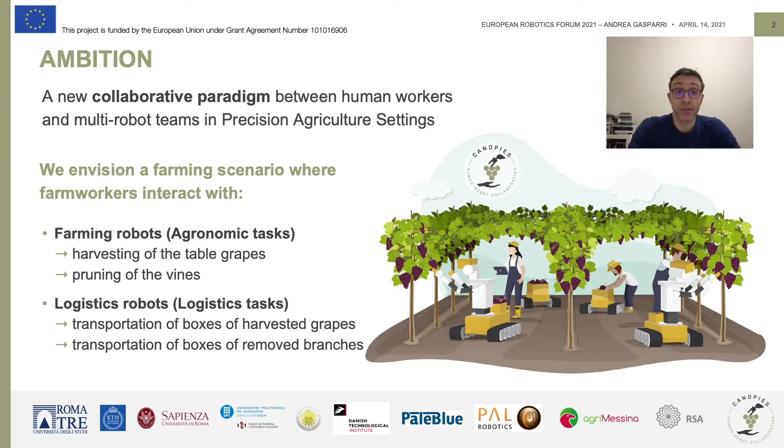As you can see on the right, we envision a farming scenario where farm workers will be interacting with 2 different kinds of robots. We will have farming robots, which will take care of the agronomic tasks, and logistics robots, which will take care of the logistical tasks.

Our approach is to design an efficient data-driven technological solution based on robotics and artificial intelligence for the sustainable agriculture of tomorrow. In this regard, we will propose novel human-robot interaction techniques which will ensure enhanced safety and coexistence in the shared workspace.

We will also develop novel human-robot collaboration techniques in order to achieve effective cooperation through explicit interaction. Finally, we will also develop novel multi-robot coordination techniques to ensure scalability over large areas.

Overall, we truly believe that Canopies may have a significant impact in the agri-food sector. On the one hand, we will provide a means to handle the increased complexity of outdoor, unstructured, and dynamical environments, such as for permanent crops.

In the meanwhile, we will also mitigate the shortage of agricultural labor, which is one of the major challenges that the agri-food sector is facing right now.

In addition, we will promote a better educational model, which is required to interact with the cutting-edge technological solutions that will be developed. Furthermore, we will also promote gender equality by reducing the drudgery typical of agricultural field operation. In this way, we will also render the agri-food sector appealing again for young generations.

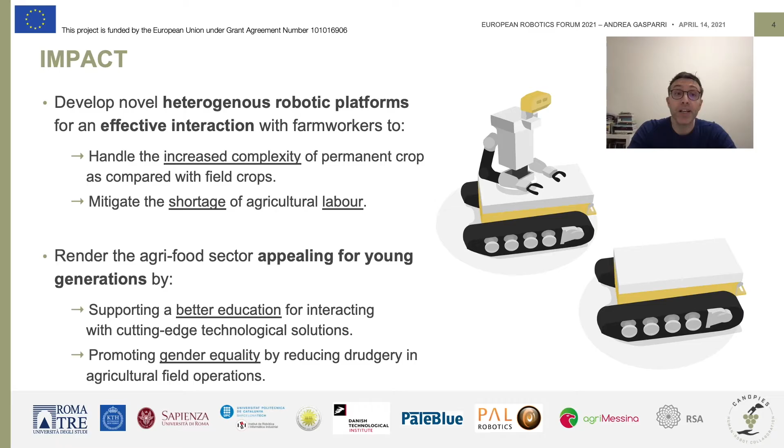Hello, let me pitch the Horizon 2020 Research and Innovation Project Darko to you. My name is Achim Lilienthal and I have the honor and pleasure to coordinate this project. The consortium includes 2 enterprises and 5 academic partners.

Darko targets the priority area agile production, so from a business perspective, we are talking about quick adaptation of production processes in response to customers' needs. The interest is in tools that enhance flexibility in production while maintaining cost and energy efficiency as well as quality.

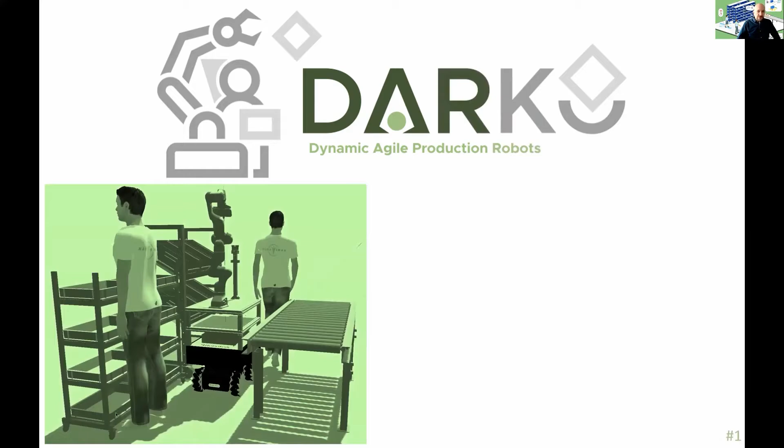The tools are production robots, which operate in environments shared with humans. For being capable, safe, and efficient, they learn and optimize knowledge and operations, for example, by learning motion patterns in changing environments to choose paths that avoid traffic jams.

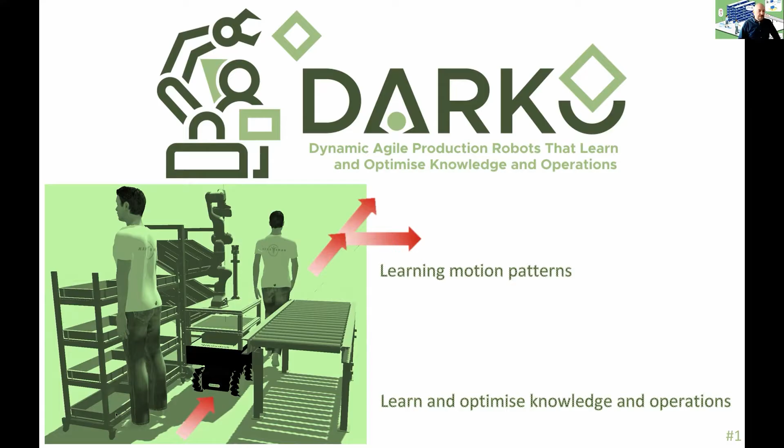So what are our objectives and what is the Darko approach? Darko sets out to realize robots with time and energy efficient manipulation capabilities demonstrated through pick and place in motion and throwing of objects, with energy efficient, inherently elastic manipulators and flexible end effectors.

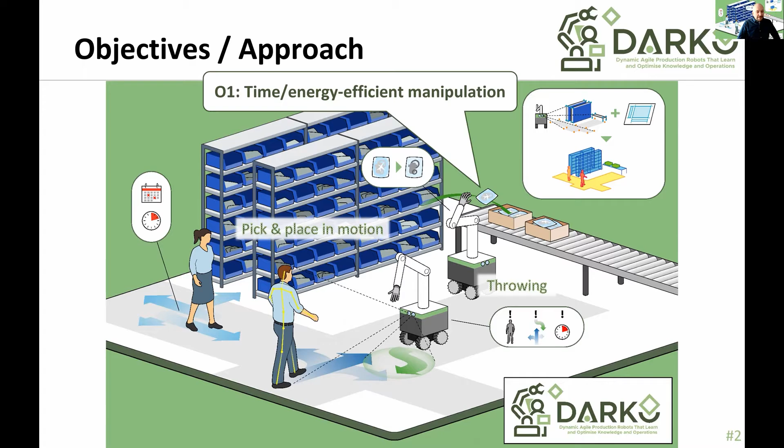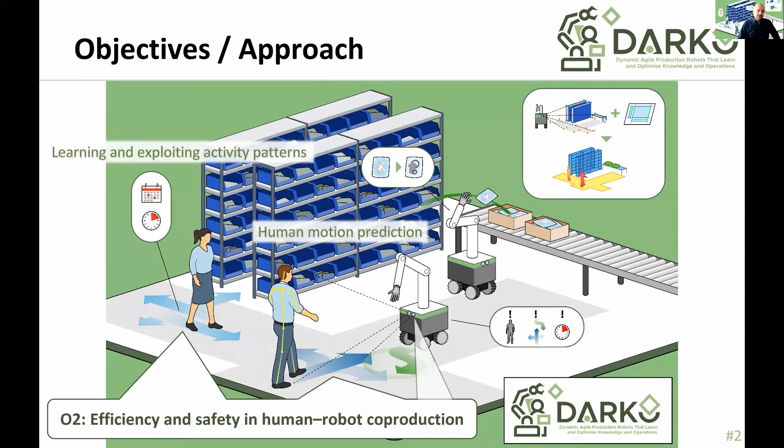Second, for safety, efficiency, and legibility, the robots need predictive planning capabilities through human motion prediction, learning and exploiting activity patterns, mutual communication of intent, and risk-aware planning.

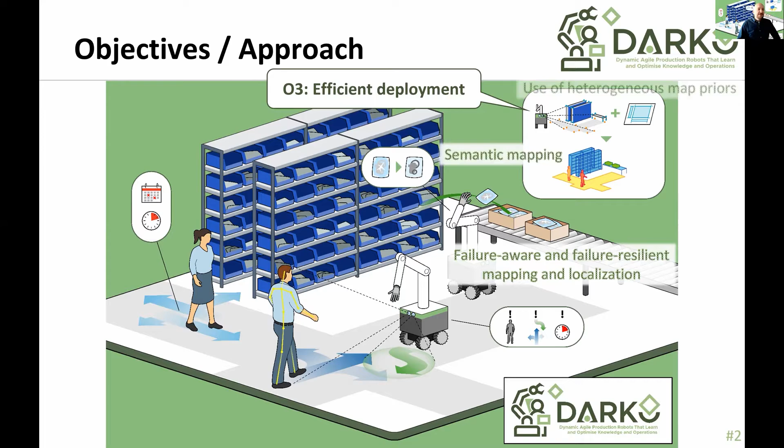The third key objective is easy and cost-efficient deployment, which Darko supports through the development of failure-aware and failure-resilient mapping and localization, semantic mapping, and information transfer from heterogeneous map priors.

To maximize its impact, Darko is aligned with use cases at the largest manufacturer of home appliances in Europe, and it will be demonstrated at the warehouse and at the Arena 2036 in Stuttgart, permanently showing our effort to lower technical barriers within logistics and agile production.

Darko will demonstrate improved autonomous capabilities in AI-enabled 3D perception and scene understanding, and it will go significantly beyond the current state of art in dynamic manipulation, not only for the benefit of agile production, but also for healthcare, agri-food, and so on. This is the project Darko.

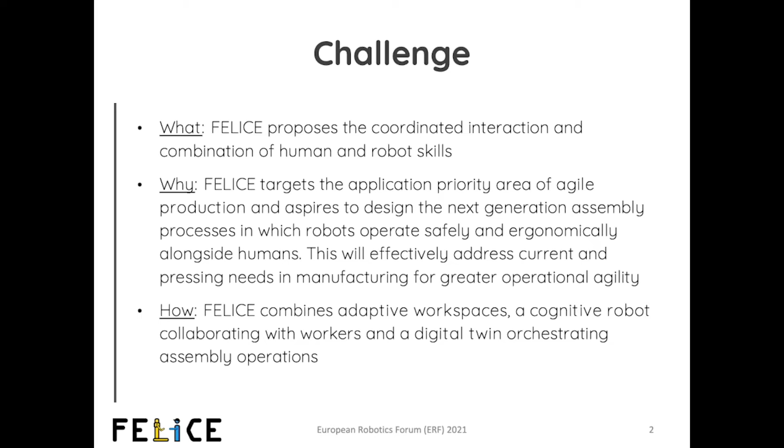The main project objectives are to develop context awareness via ubiquitous sensing, ensure safety in human-robot collaboration, amplify fluency and ergonomics in collaborative assembly tasks, and orchestrate the assembly process in real time. These contribute to the ultimate goal of realizing collaborative assembly lines for agile production in real environments.

Networking with relevant digital innovation hubs aims to support the exploitation of freemium assets and speed up prototyping.

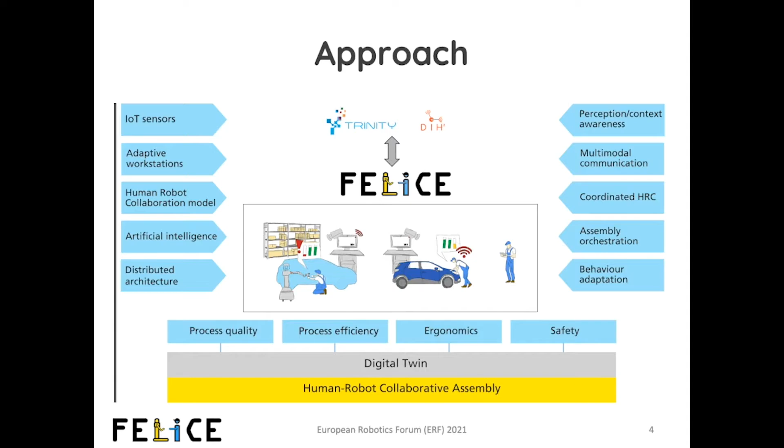FELICE's framework stands on five major pillars. The first concerns smart process monitoring via the integration of heterogeneous sensors and devices in industrial environments. The second relates to collaborative robots with advanced cognitive capabilities, mobility, and adaptability for joint task execution, addressing safety and fluency. The third deals with an AI system for real-time orchestration and control of adaptive assembly lines. The fourth supports a distributed architecture computing paradigm and reusable toolkits, while the fifth is about technology validation in real industrial environments.

FELICE impacts innovation, competitiveness, and market growth through increasing the adoption of collaborative industrial robots by lowering costs with a single mobile platform that can support different workstations and assembly tasks on demand, with improved flexibility and agility. It also improves data privacy and security through a privacy-by-design approach for handling personal data and security mechanisms for the distributed processing of data, along with AI-augmented automation with the human worker at the center point.

This leads to the realization of future smart factories, interoperability between sensors and modules, and expandability and modularity of the developed technologies. Additional societal impacts concern individualism, improved life quality and workability, healthy and safe workplaces, as well as decreased automation bias.

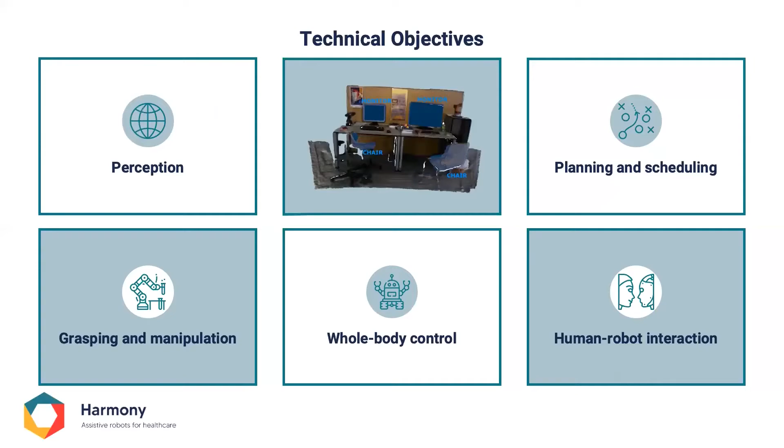We will formalize object-based perception to capture multimodal scene information needed for robot navigation and object manipulation. We will develop robotic localization and mapping for dynamic object-based environments, and we will provide adaptive, collision-free motion plans as well as joint action planning and execution with human collaborators.

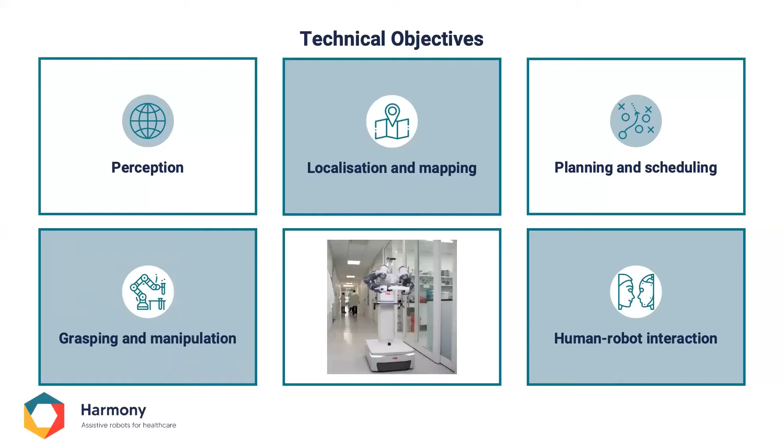Our robots will learn clinically verified grasping and manipulation procedures from expert demonstrations via an immersive control interface. We will develop robust and compliant whole-body motion planning and control for interacting with unknown objects, and we will deliver safety and acceptability recommendations for the use of mobile manipulators in human-centered environments.

The success of our project also relies on integrating these technologies into a user-intuitive framework. Harmony targets two exemplar use cases to validate and verify our technologies.

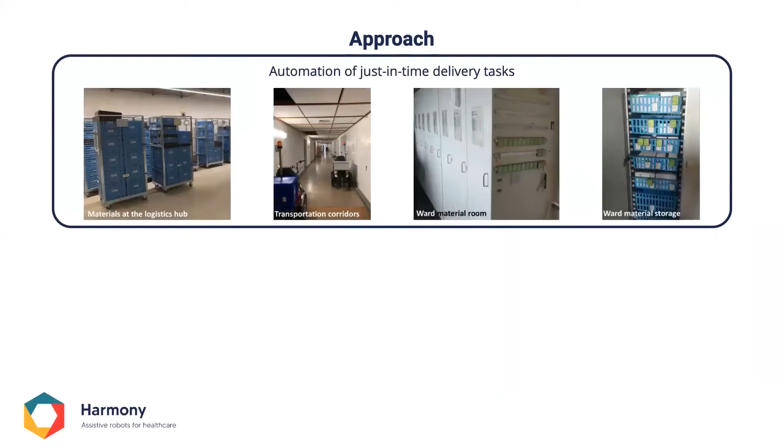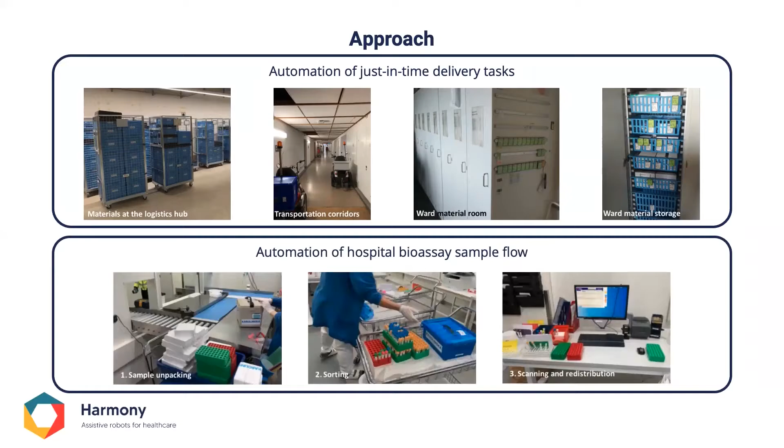The automation of just-in-time delivery tasks requires robots to fetch and deliver materials on demand from across the vast logistics network of a hospital. The automation of hospital bioassay sample flow requires robots to unpack, sort, and process incoming patient samples for on-site testing or for redistribution to off-site testing.

The fundamental capabilities we're targeting in Harmony directly meet growing needs in all sectors: healthcare, agile manufacturing, agri-foods, as well as industrial inspection and maintenance, and more.

Beyond providing flexible and user-friendly automation, Harmony will bridge the gap in existing industry standards to cover mobile manipulators. This will clarify technology certification requirements and remove existing barriers to expand the use of assistive robots, increase industry uptake, and ultimately strengthen Europe's competitiveness in the cobot market.

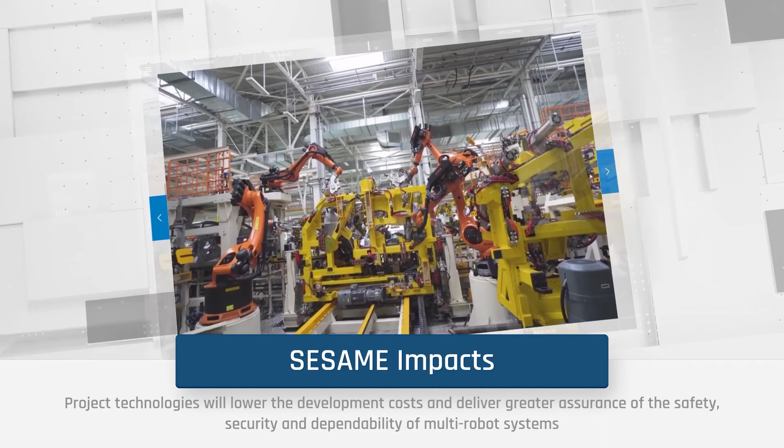Tracebot: traceable robotic handling of sterile medical products. The objectives and ambitions regarding Tracebot.

Today, manual procedures still dominate when it comes to creating and testing new healthcare products, since regulations require understanding of the execution of each process step and systematic checking to verify task completion.

Current robotic solutions lack systematic action traceability and failure resistance. The objectives of the Tracebot project are to bring verifiable actions to robot manipulation by reasoning over sensor-actor trails.

This is done in a traceability framework based on digital twin technology, to extend current robot motion planners with the execution of self-checking procedures and create a semantic trace of the actions performed, and to extend current robotic system technologies to perceive and manipulate the challenging but regular objects in pharmaceutical settings.

The goal is to create flexible robotic systems able to perceive, act, and reason in the pharmaceutical domain, to ensure that any manipulation action is verified, thus leading to the audit trail required in the regulated environment.

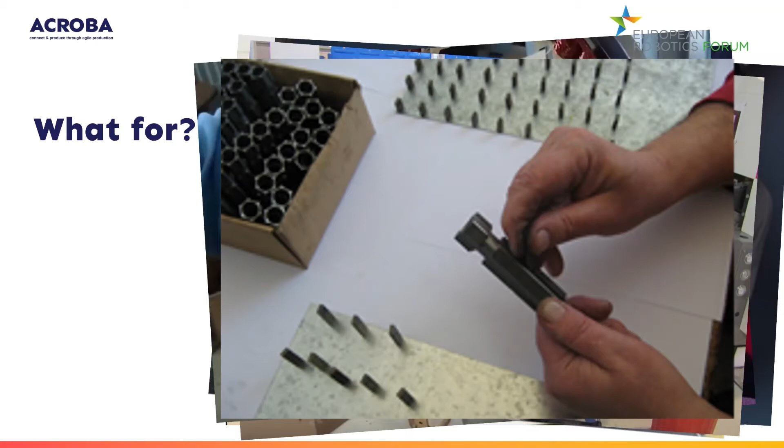At the beginning of our project stands the observation that in a lot of manufacturing enterprises, work is done by manual labor, despite the fact that it's difficult to find labor because the operations are tiresome, bear potential for injuries, need to be done in sterile environments, involve harmful chemicals, can be error-prone, or sometimes simply a third or fourth hand would come in handy. It is our ambition in this project to give those enterprises relief by proposing them a platform which finally makes the use of robots a pleasant and, more importantly, a profitable undertaking.

What we want to do from a technical point of view is to build a platform. It will offer a series of cognitive capabilities. During operation, these will be fed by process feedback. Among the capabilities will be a task planner fitting into the existing workflows of the manufacturing and being able to read CAD files and coordinate the robot's actions.

Additionally to the task planning, the CAD data will also be used to populate a virtual gym, which in turn is necessary to perform deep reinforcement learning without causing damage. Acroba will also be able to learn from demonstration, which hence is another cognitive capability included. It will be implemented alongside corresponding tools for user interaction.

Finally, to make the actions of the controlled robots precise and safe, the execution of them will not only depend on single sensory readings, but the platform will combine the information from all available sensors to provide multimodal perception.

With these capabilities in place, our pilot lines will be able to detach 3D printed parts for sterile medical use from their supports, wash and cure them. They will be able to deburr large injection molded plastic parts, both with little to no interaction in so-called lights-out manufacturing scenarios. They will also be able to wind coils for motors and place magnets on rotors.

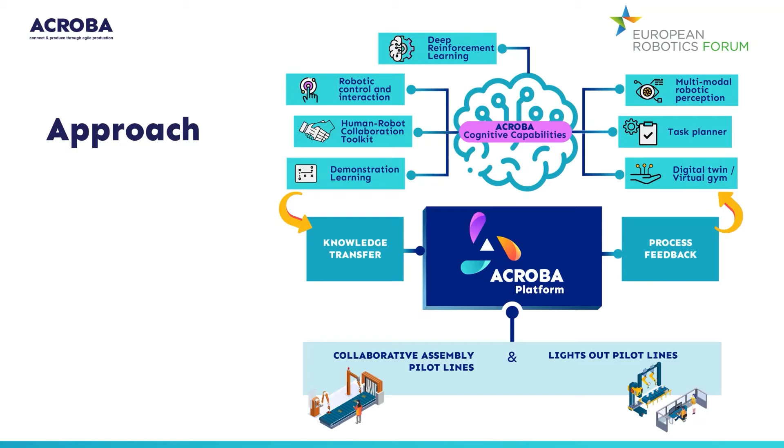They will place pin through hole components in PCBs, both together with humans supporting them in collaborative scenarios. And of course, the Acroba platform will easily be portable to other manufacturing cases.

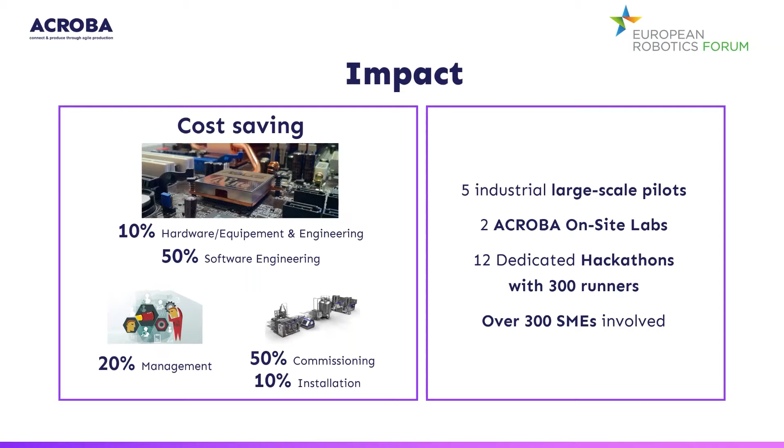Due to the continuous increase of the world's population, the production of environmentally friendly, sustainable food presents the big challenge of the 21st century. Insect farming might represent a sustainable solution to the challenge of securing food, with proteins from insects being the basis of novel food, and insects also being a valuable food source for farming animals. However, to make insect farming a viable solution, research innovation, the development of farming protocols, and public awareness campaigns on insects as food and feed are dramatically needed.

The H2020 project CoRoSect, on cognitive robotic systems for digitalized and networked automated insect farms, targets these challenges. The ambition of the CoRoSect partners is to make a viable contribution to securing sustainable environmentally friendly food for humans and animals. Together we bring new insights to automated insect farming and develop novel digitalized integrated robotic solutions. We will create an advanced, safe collaboration environment where humans and robots harmoniously share and undertake processing and manipulation tasks.

We will also advance AI-based cognitive perception at different phases of the life cycle of the insect farm process and develop cognitive robots with sophisticated capabilities for robotic action planning, manipulation, and control. CoRoSect's approach focuses on providing a novel robotization and digitalization concept, enabling upscaling and optimizing insect production capabilities, utilizing state-of-the-art robotization and artificial intelligence. To achieve this goal, CoRoSect develops cognitive robots, smart mechatronics, as well as artificial intelligence for machine perception and human-robot collaboration, and combines these with new concepts for farm modeling and orchestration, following the RAMI 4.0 framework.

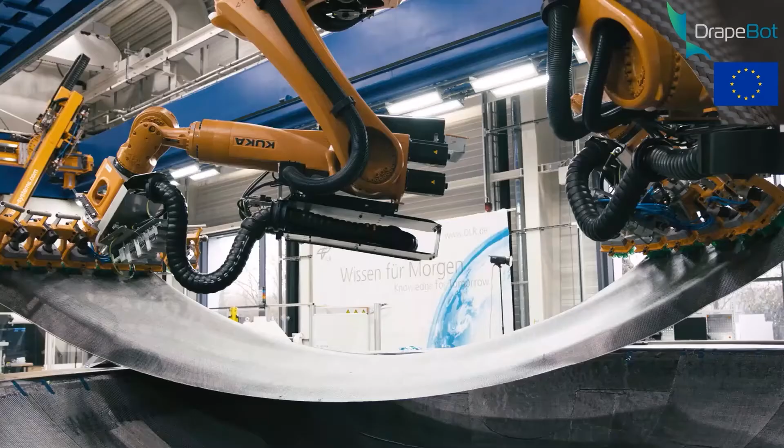We also need to make sure that there are no wrinkles and that the fiber is going in the right direction. Draping may include large patches of material, which can be up to several meters long, and also very small patches, which are just a few centimeters wide.

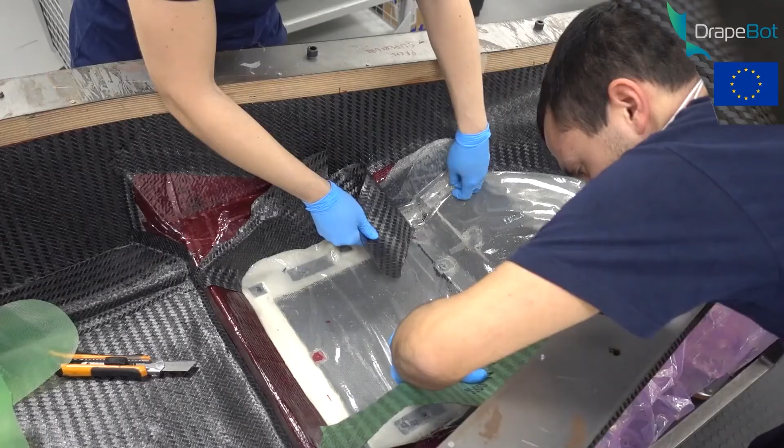Collaborative draping tries to combine human and robot activities during the draping, especially during the transport of the large patches. But also during the draping itself, the robot will be able to drape the areas of low curvature, which are usually larger, while the human will do the higher curvature areas that are difficult to handle. Overall, we are trying to increase the efficiency of the draping process.

The main approach that we are looking at is to perform task and motion planning in order to split the tasks between the human and the robot, for example, during the transport and during the draping of areas of low and high curvature. In order to achieve this, we equip the gripper with additional sensors to allow accurate placement and to have some kind of feeling during the transport of the material.

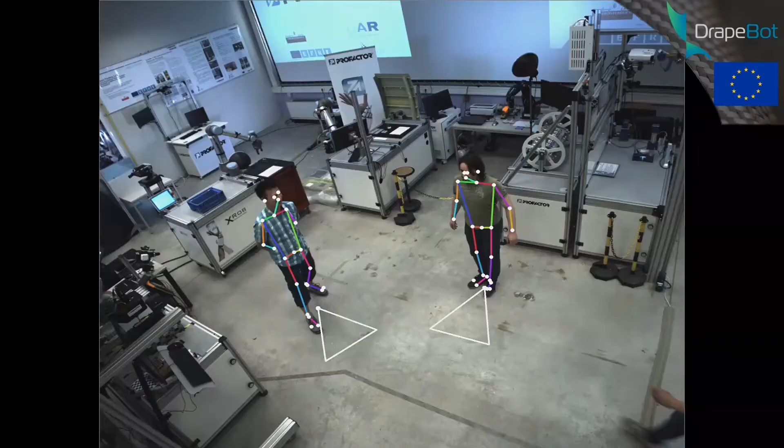The work cell itself will be equipped with visual sensors to estimate human position and localization and to make a prediction about the intentions of the human. Finally, there will be a low-level control loop that is used to maintain the correct tension on the material and to ensure an accurate draping process.

The Drapebot project will have impact on reducing the costs of the draping process. We estimate that 30 to 50% are feasible, and the technologies that are developed will be usable for about 2,000 companies in Europe. At a larger scale, we try to provide methods that allow efficient human-robot collaboration, and we will have 2 robotic work cells available in the end that are also used for disseminating best practice.

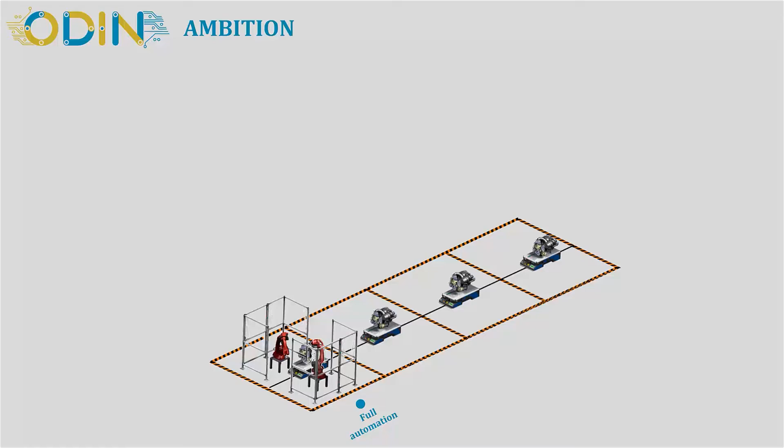Odin is a European-funded program aiming to deploy open, digital, industrial and networking pilot lines using modular components for scalable production. In fixed automated systems, although robots are fast and dexterous, their actions are pre-programmed, and it takes a lot of time and effort to add new processes in the same factory.

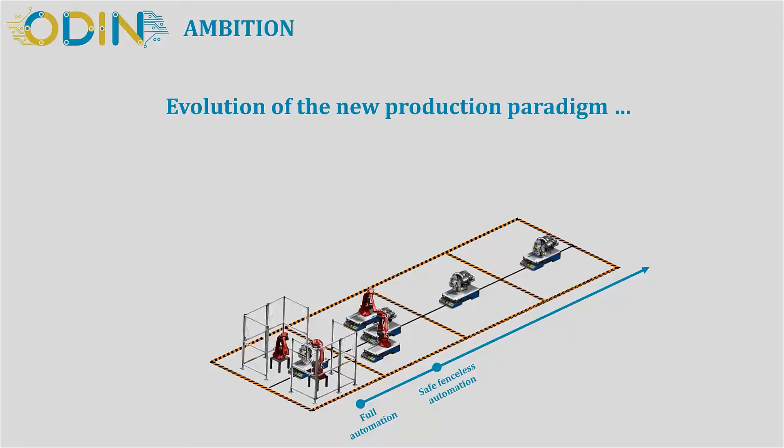To address this flexibility limitation, new production paradigms have been emerging, empowered by the development of advanced robotics capabilities. Novel perception abilities have been deployed to enable the autonomous operation of robots under fenceless workplaces. Resource mobility has been introduced as a key enabler to assist human operators during production. Advanced safety systems, integrated with powerful artificial intelligence tools, can boost the ultimate goal of seamless collaboration between robots and human operators.

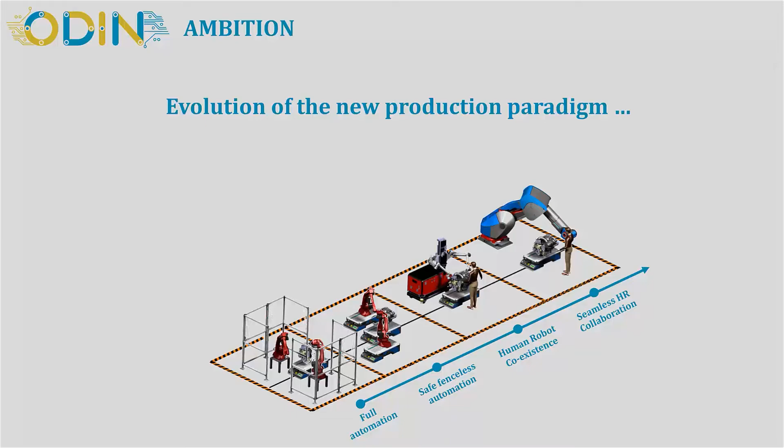The vision of ODIN is to demonstrate that these modern robot capabilities are not only technically feasible, but also efficient and sustainable for immediate introduction at the shop floor.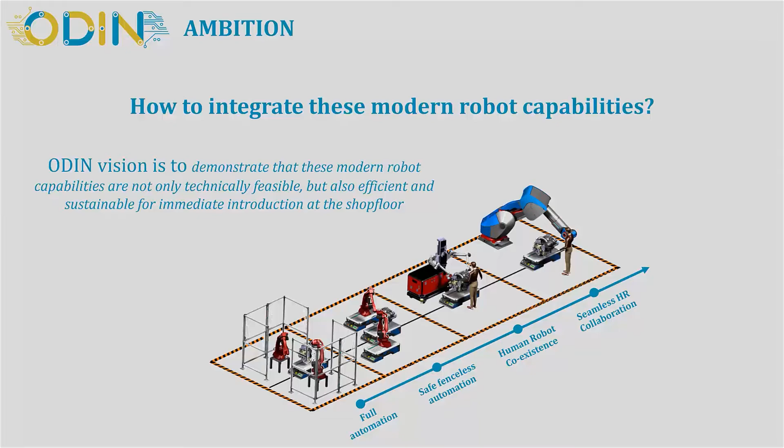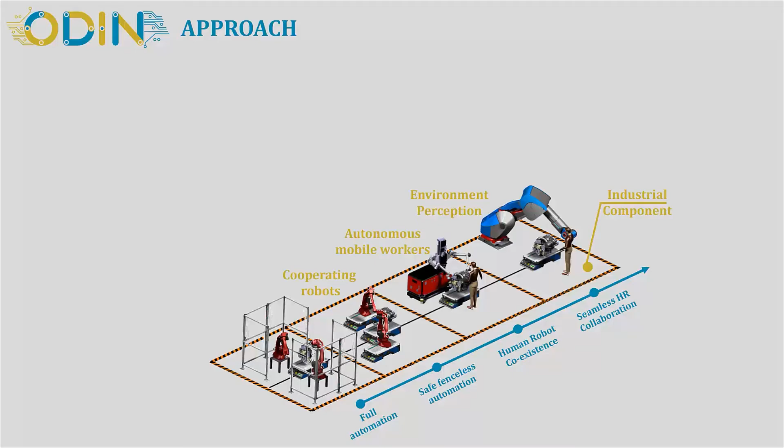To accomplish this, Odin aspires to enable the introduction of mobile, autonomous, environmentally aware and collaborative robotics in industrial settings, and create digital validation tools for these robotic systems to allow scalability with minimum complexity and integration risks.

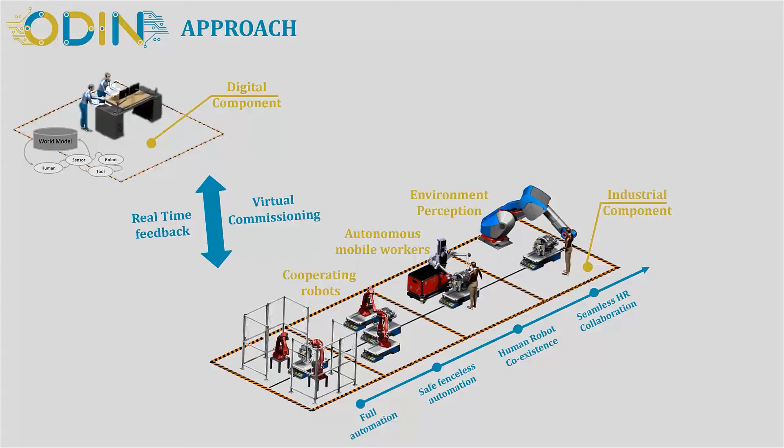Create an innovation ecosystem to enable the sustainability of open pilot lines, involving robotic application stakeholders and inspiring further deployment. Deploy an integration architecture with open interfaces, allowing the communication of all robotics hardware and control systems through safe and secure means.

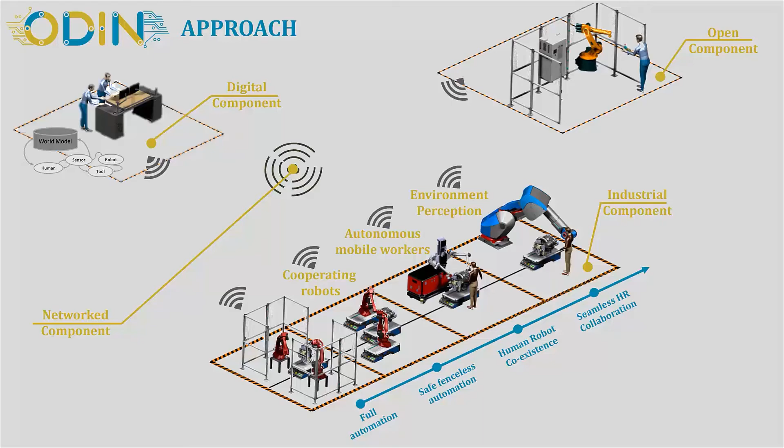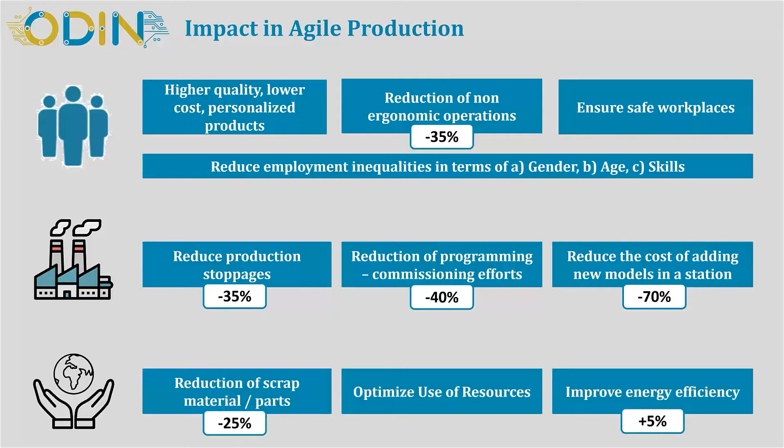Odin aims to make a change in agile production towards 3 directions. In society level, by facilitating the production of personalized products while supporting human operators in production. In the European manufacturing domain, by enabling sustainable and cost-effective processes. And in environmental level, by optimizing the use of material and resources.

The consortium consists of 15 partners from 8 European countries, carefully picked to implement the vision of Odin. To learn more about our activities, we invite you to visit our project site and connect with us in our social networks.

Robotics and farm automation technologies have seen a significant spike in interest and investment, marking the start of a structural change in food and farming. But for the most part, commercial robotics is still mainly unexploited.

Robs4Crops promises to bring a high-tech revolution to farms and offer a tremendous potential impact on productivity, efficiency, and environmental sustainability. We are a multidisciplinary network building a family of fully autonomous robotic systems ready for large-scale commercial trials.

In a bold commitment to mainstreaming robotic farming, Robs4Crops will develop a safe testing ground for iterative development and innovation through a network of collaborating partners.

The existing agricultural implements and tractors will be upgraded so that they can function together with existing agricultural robots as part of a fully autonomous robotic system. Our flexible and modular new generation system will consist of 3 elements: smart implements, autonomous vehicles, and the farming controller.

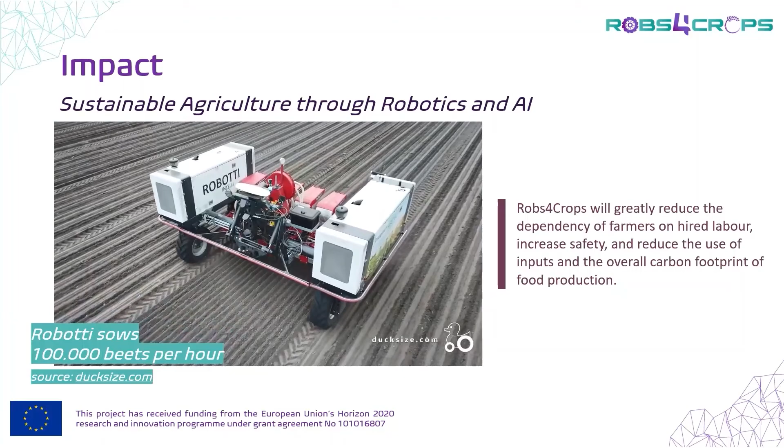Agriculture accounts for around 10% of greenhouse gas emissions in Europe, with little improvement over recent years. From more efficient crop management to chemical-free weeding, the fields are ripe for robotics and artificial intelligence. Besides, agriculture is very sensitive to the cost and scarcity of labor. Making cultivation practices more efficient and sustainable is critical.

While the cost of labor affects the profitability of farming, the COVID-19 pandemic demonstrates that the scarcity of labor threatens the very existence of our food supply chains from farm to fork. Robs4Crops will greatly reduce the dependency of farmers on hired labor, increase safety, and reduce the use of inputs and the overall carbon footprint of food production.

Hello. As a former robotics teacher and organizer of international robotics competitions, I have over the years seen thousands of people who are really fond of robotics, and they believe that robotics is definitely a source of innovation as well as economic growth. As a citizen, I fully acknowledge the benefits that robotics brings.

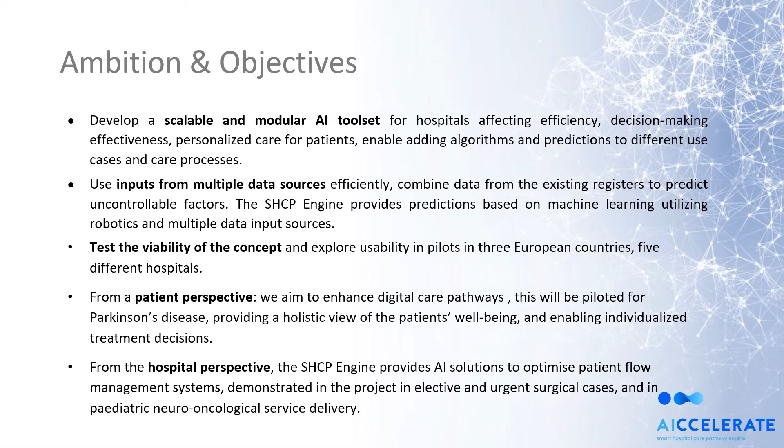Our objective is to use efficiently the different data inputs that are generated in hospital operations, including IoT and robotics devices. This concept will be tested and piloted within the project in 3 different European countries, and 5 hospitals.

The Smart Hospital Care Pathway Engine includes a standardized data input interface, a toolset that can be used in different areas of hospital operations, as well as data outputs and a UI layer. This solution can be integrated to different data infrastructures depending on the hospital's current state.

We will be having 3 different pilots, one for patient flow management in the surgical units, one for chronic adult care, and one for chronic pediatric care. These different pilot applications will be testing the viability and scalability of this concept.

Our expected impacts include using and allocating healthcare resources more efficiently, providing personalized care and digital care pathways for patients, and optimizing patient flow. We also hope to contribute to efficient algorithm development, as well as evidence-based and trustworthy AI in the healthcare arena.

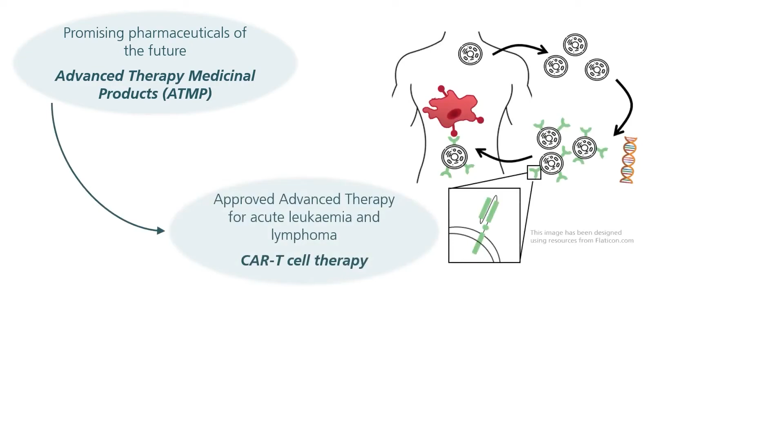One therapy that is already being applied for the treatment of acute leukemia and lymphoma is the so-called CAR-T cell therapy. The manual processes currently used in laboratories cause high costs, require long production times, and have only a moderate chance of success.

The Aidpath Consortium has set out to automate AI-powered CAR-T cell manufacturing in the hospital, making this therapy accessible to a wide range of patients.

The CAR-T cell manufacturing will take place in the hospital in an automated platform, in compliance with all regulatory requirements. The entire process chain is supported by artificial intelligence, which not only suggests patient-specific process sequences, but also optimizes the whole manufacturing process on the basis of the cell behavior.

A secure data infrastructure enables continuous learning of the artificial intelligence and straightforward connection to existing IT systems in the hospital.

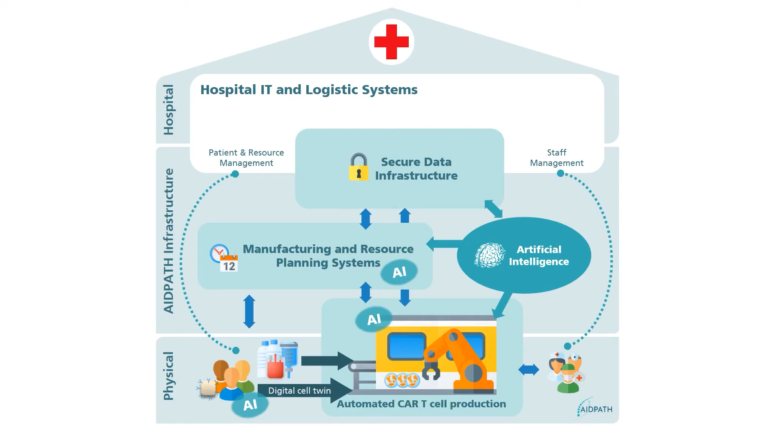Over the next 4 years, Aidpath will demonstrate that AI-based technologies are effective for automating the process of advanced therapies. Aidpath will build the basis for a deployable platform so that pilots can be initiated in multiple hospitals.

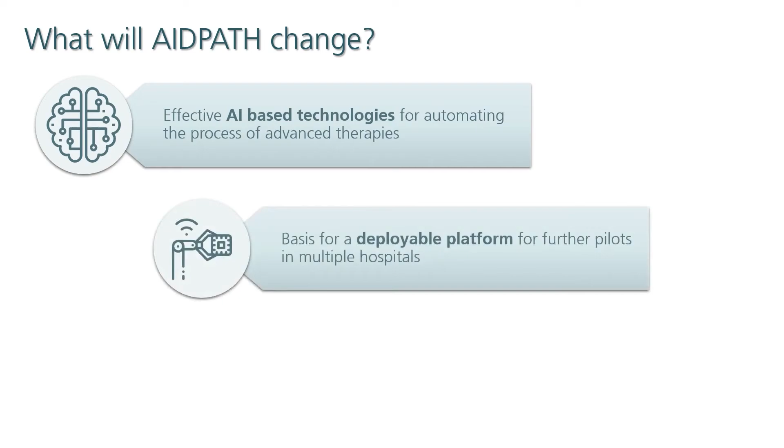Also, Aidpath will create an innovation ecosystem for a lively exchange of the stakeholder community, driving the concept of the smart manufacturing hospital forward.

Hello, I'm Thanasis Poulakitas, the coordinator of HosmartAI, and I will now give you a very brief introduction to this project. Our vision is to support an effective and efficient healthcare system transformation, which will utilize AI and robotics.

Our mission, that is our main objective, is to provide an AI-supported platform that will allow the composition of smart services for healthcare, offering also the possibility to analyze the benefits.

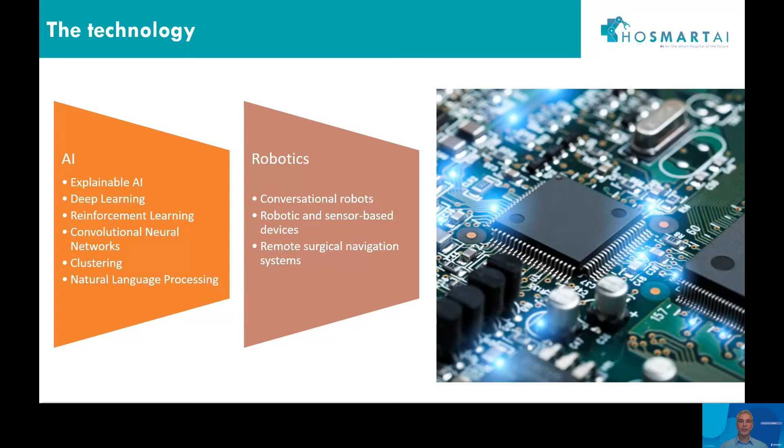The first pillar of our approach is the technology in AI and robotics. The second pillar is the platform. This includes the HosmartAI hub, which is composed of a marketplace, a co-creation space, and benchmarking framework under a uniform user interface.

From there, applications are developed and deployed in the application space where they run and provide feedback. The architecture builds from the infrastructure up adding interoperability and control components, then AI services, along with the composition of healthcare applications.

The third pillar is our pilots, who will validate our solutions. They cover wide domains from hospital logistics to diagnosis, treatment, etc. They also address a number of medical fields, from cancer, gastrointestinal disorders, etc.

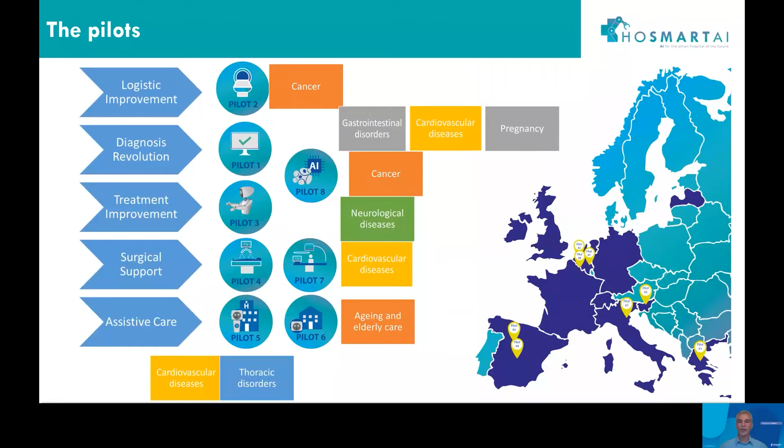Our final pillar is our methodology, an agile approach bringing together the technology providers with the pilots and ecosystem. There will be 2 iterations, and there will also be 2 open calls.

What is the impact of HosmartAI? We expect to have strong impact in pilot applications supported by open platforms, in demonstrating the effectiveness of AI-based technologies, and in contributing to trust and acceptance of AI.

We aim for a strong impact in engaging the ecosystem and leveraging more funding. Finally, we expect specific important impact from the pilots in the medical fields that were mentioned earlier.

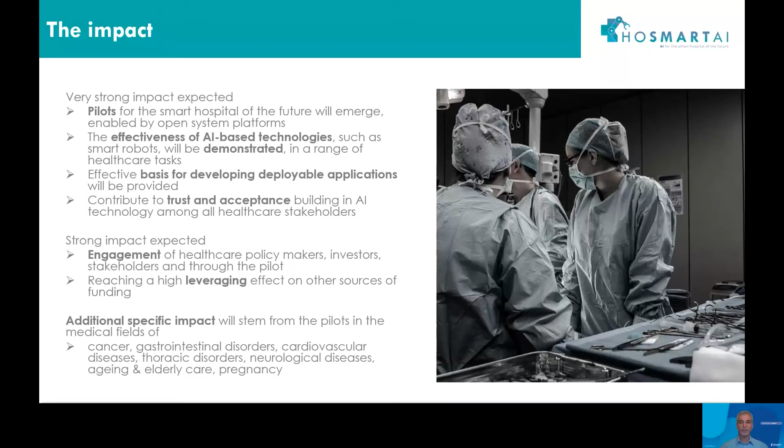Hello, everyone. I am Sergio Guillén, Deputy Coordinator of Odin project. Odin is a large-scale pilot project on the transformation of the hospital of the future by artificial intelligence and robotics.

Odin envisions the hospital of the future as an organization empowered with advanced digital technologies, improving safety, efficiency, and quality. Odin will use robotics, artificial intelligence, and IoT to build that vision across all operating areas in a hospital.

Our goals are the enhancements of the hospital workers' skills, automatized hospital processes, including hospital logistics, infrastructure management, hospital reconfigurations, and patient flow optimization.

How are we going to do this?

Odin will build an artificial intelligence robotic IoT ecosystem, deployed in 6 reference hospitals in Europe in a multi-centric pilot implementation. The main areas of pilot intervention will be logistics support, clinical engineering and medical device management, AI support systems for diagnosis, clinical tasks and patient experience, automation of clinical workflows, home hospitalization, and disaster preparedness.

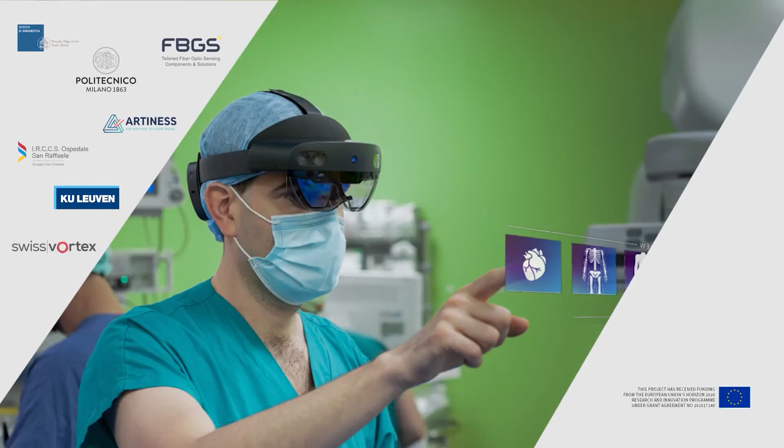Artery is going to revolutionize transcatheter interventions. We are going to develop catheters with distributed sensing and actuation that observe the environment, interpret it, and autonomously decide how to move through it.

The same sensors used to control the catheter provide information to the interventionist. She or he can use this information to provide high-level control commands and position, for example, an implant with greater precision than ever before.

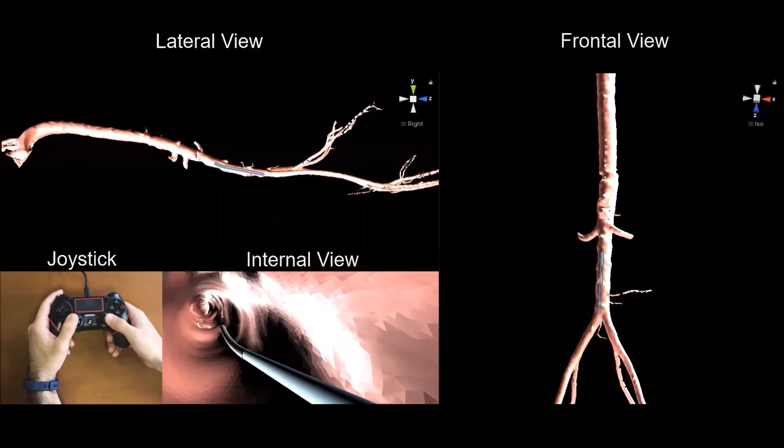In the Artery project, the operator will interact with the system through a holographic display, which will allow visualization of the virtual vasculature tree. The operator will also interact with the system through a holographic interface, which will allow him or her to direct the catheter pose. An artificial intelligence module will allow interpretation of the intraoperative ultrasound imaging and estimation of the inverse kinematics to better control the catheter pose.

By 2060, about 15 million cardiovascular patients will be in need of optimal and minimally invasive treatments. Artery is opening the era of robotic steerable catheter technology. By shortening radiation time and maximizing procedural standardization, the safety and efficiency of interventional therapies will be increased.

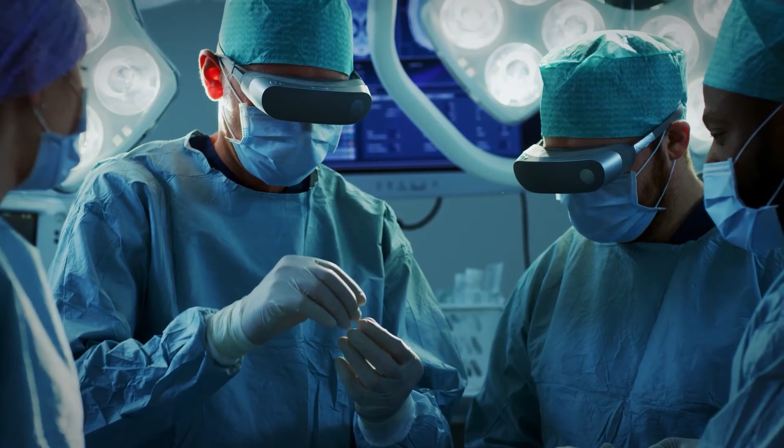For the physicians, this brings shorter procedural times, more predictable outcomes, and improved learning curve. For the patients, this is associated with enhanced procedural safety, reduction of morbidity and mortality, lower complication rate, and shorter hospital stay.

Good morning everybody. I'm Nikos Tsagarakis from IIT. I'm here to present CONCERT, a new project that we started recently.

CONCERT comes from Configurable Collaborative Robot Technologies and targets creating a transition from existing current collaborative robotic systems towards systems that are more flexible and modular and can be used in evolving production lines.

We plan to develop a modular system that can be tailored to the requirements of different tasks. It can demonstrate different physical performance settings, able to apply high-level human-scale forces against the environment, while at the same time ensuring safety during collaboration with human operators. Finally, we equip these systems with adaptive collaborative skills that will allow us to arrive at more efficient human-robot collaboration performance.

We developed this technology within a consortium composed of 6 partners from 4 European countries: from Italy, IIT is coordinating the project, along with Poland, Germany, and Austria. The plan is to reach our goal by developing 4 fundamental technologies.

The first is robotic modular systems that permit the composition of different robot configurations to match the different requirements and variability of the tasks. At the same time, we provide tools that give the user the capability to compose optimal topologies of these configurations, starting from the requirements of the task.

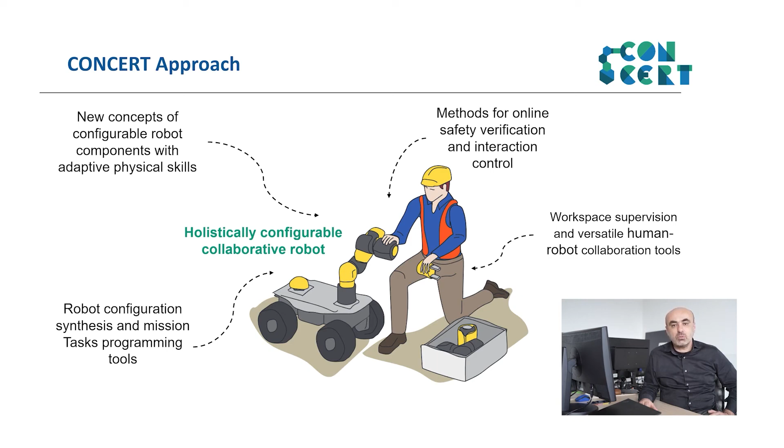We apply the technology to the construction sector, a very promising application area that also involves high challenges for robotics. Thanks to the variability of the task and the construction environment, the CONCERT technology is highly motivated to develop a system that can cope with these kinds of challenges.

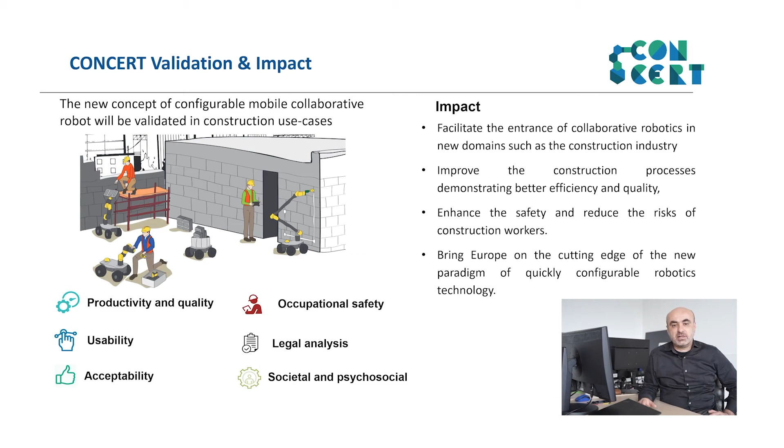We plan to demonstrate these advancements and the performance increase using the CONCERT technology, using a number of performance indicators, starting from production efficiency of task execution, the acceptability and usability of the technology, towards legal aspects, occupational health and safety, and psychosocial aspects of the technology when used by workers.

Thank you very much for your attention. I will be happy to provide you more information, and please visit our website for learning more about CONCERT and the coming results of the project. Thank you very much.

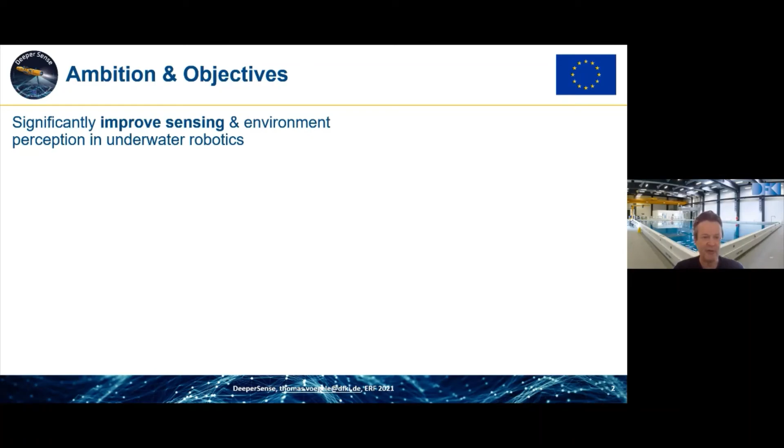Hi, my name is Thomas Vögele and I'm the project coordinator of DeeperSense, Deep Learning for Multimodal Sensor Fusion. In DeeperSense, we unite a consortium of 7 companies and institutes from 3 member states, and our ambition is to significantly improve the sensing and environment perception capabilities, in particular of underwater robots.

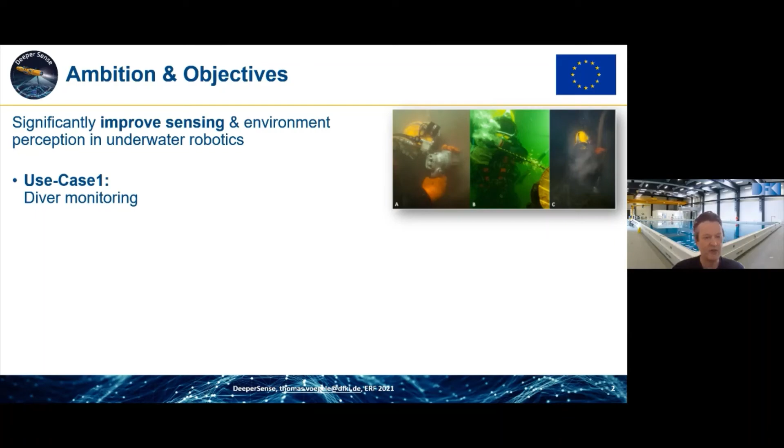We want to do this in 3 use cases. In use case 1, we concentrate on diver monitoring under turbid visibility conditions. In use case 2, we're looking at AUVs that navigate in coral reefs. And in use case 3, we want to improve seabed mapping and classification.

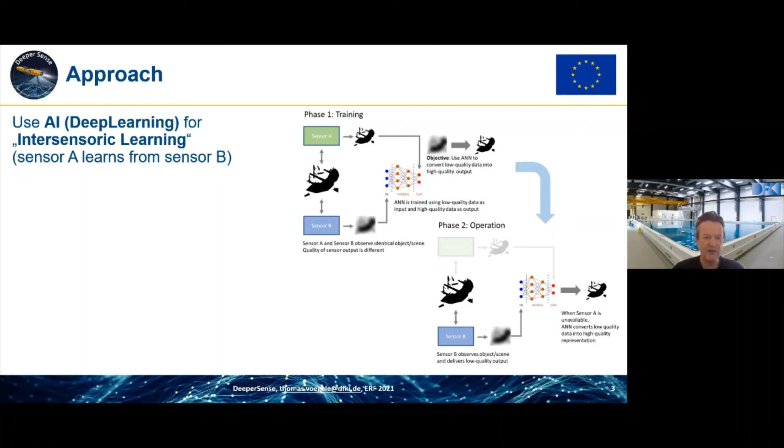Our approach is to use the latest technologies in artificial intelligence, mainly deep learning algorithms, for something that we call intersensoric learning. In intersensoric learning, one sensor learns from another sensor.

In DeeperSense, we want to develop 3 different algorithms for this purpose. The first one, sound to vision, will enable a low resolution sonar to learn from a high definition camera so that the sonar can see in turbid waters.

In the second one, Eagle Eye, a forward-looking camera will learn from a forward-looking sonar to identify obstacles that are way ahead and hidden in the depth.

In the last algorithm, Smart Bottom Scan, we want to enable a sonar to learn from camera images how to map and classify the sea bottom sediments.

The impact expected from this project is that we will have at the end 3 validated and tested algorithms, and they will be validated in real environments: in Germany, in the Starnberger See, a lake in southern Germany; in Israel, in the Red Sea; and in Spain, in the Mediterranean.

These algorithms will enable new applications for underwater robots, mainly for robots that have to operate in turbid waters, AUVs that want to explore complex structures such as coral reefs, and in general, the mapping and exploration of the sea bottom with the help of AUVs.

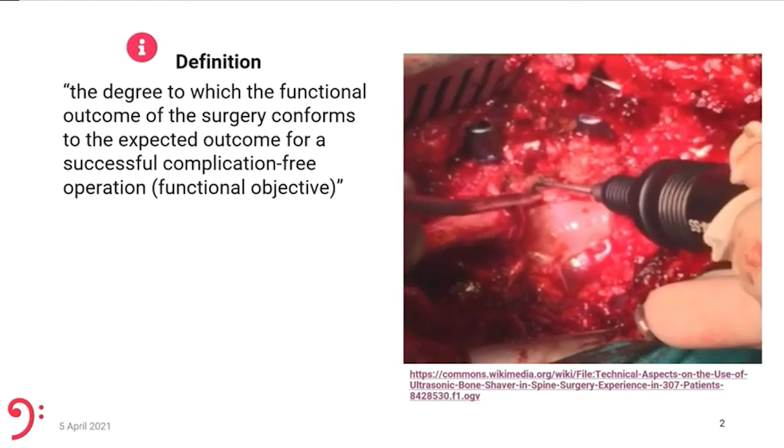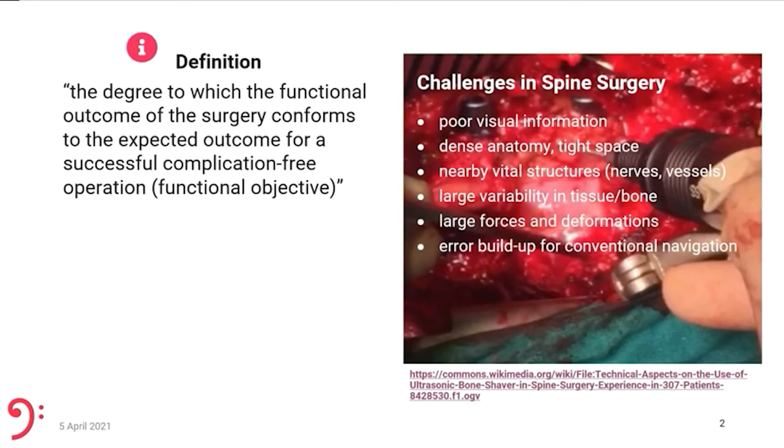In spine surgery, reaching said functional objective is difficult due to poor visualization, the need to operate in a dense anatomy and tight space, with nearby vital structures, under large variability in tissue and bone characteristics, requiring large forces and deformations, and where conventional navigation techniques suffer from large buildup of errors. Furthermore, they may resort to damaging radiation, and it's also not very well known what actions will lead to an improved outcome in the end.

That's why Faros' ambition is to introduce functional accuracy in surgical robotics. We will reduce preoperative planning and remove intraoperative fluoroscopy altogether.

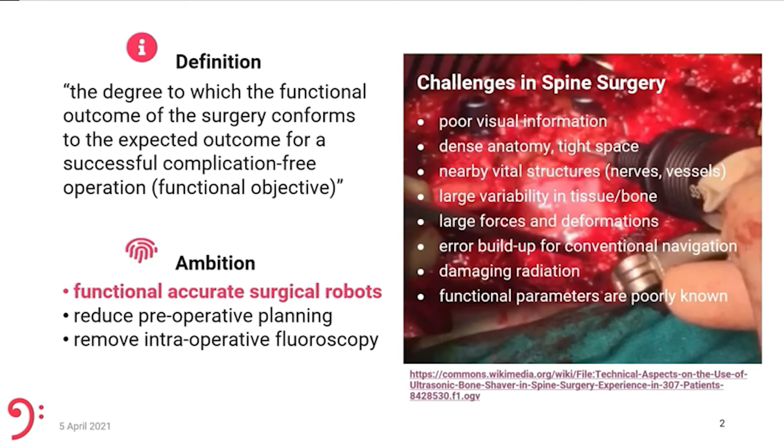We have a compact consortium of 4 partners that will be developing a wide spectrum of intraoperative sensors that provide insightful signals from the surgical site. We'll be developing functional models that relate sensor data to functional outcome parameters, and will embed physical intelligence in our robots such that they can act autonomously, optimizing the functional outcome.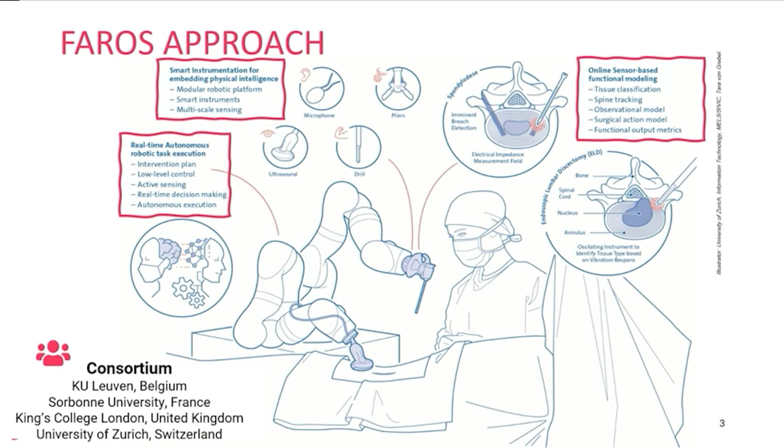Spine surgery is a highly important field, with the majority of people supposed to encounter back pain sooner or later, and large associated costs to the healthcare system. Furthermore, manual surgery sees relatively large complication rates due to the surgical intervention.

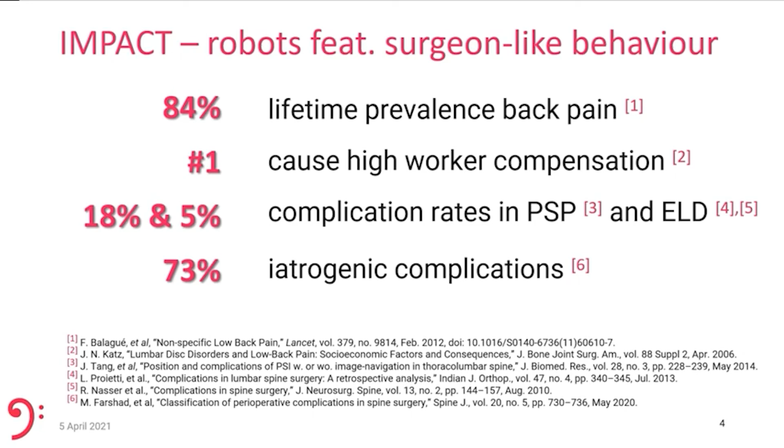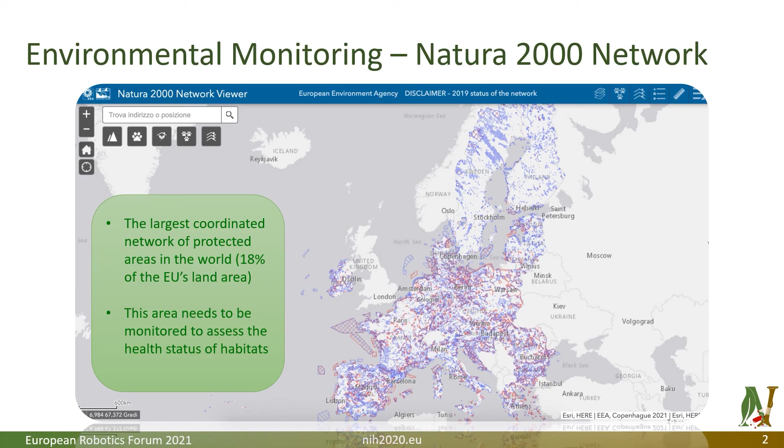Natural Intelligence Project proposed a nature-centered approach for robotic environmental monitoring. In this approach, there will be a close interaction between three components: environment, body, and mind of the robot.

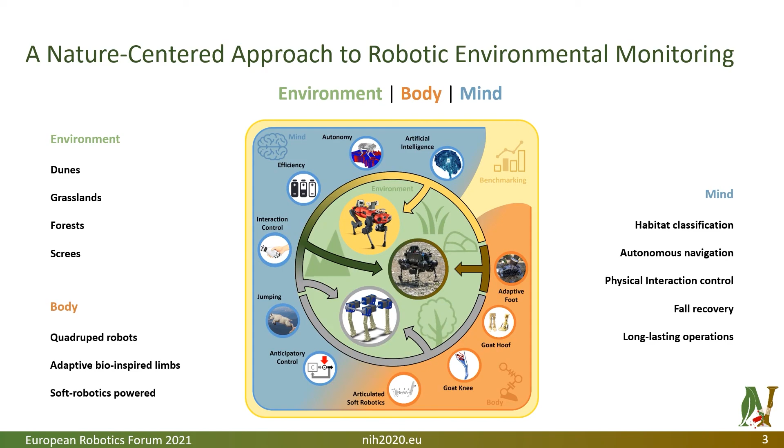The project is composed of 8 work packages. 4 of them are devoted to technical activities related to the development of the body and the mind of the robot. These components will be integrated by the dedicated work package and will interact in a feedback loop through benchmarking and standardization activities, and through field validation activities. Everything will be managed by the dedicated work package.

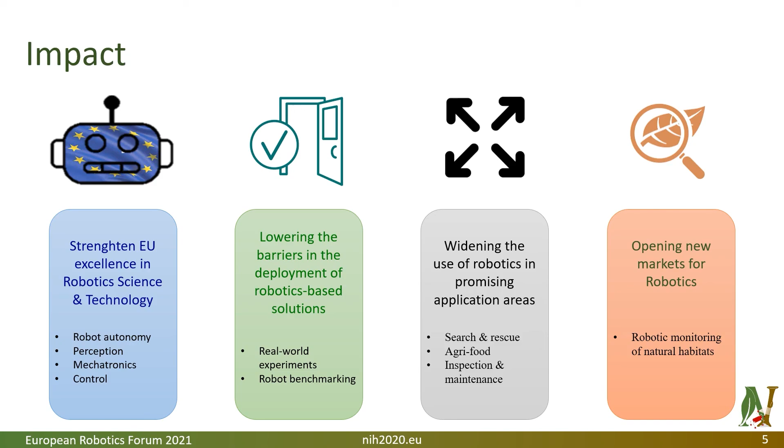Natural intelligence will strengthen the European excellence in robotics, science and technology, will lower the barriers in the deployment of robotics-based solutions, will widen the use of robotics in promising application areas, and will open new markets as robotic monitoring for natural habitat. The team is composed of 10 scientific institutions, 1 small-medium enterprise, and 4 third parties.

The partners of the project are University of Pisa, Imperial College London, Polytechnic of Zurich, Kingston University London, National Spanish Council of Research, University of Delft, Italian Institute for Research and Environmental Protection, QB Robotics. Third parties of the project are University of Siena, University of Milan, University of Sassari, and University of Perugia.

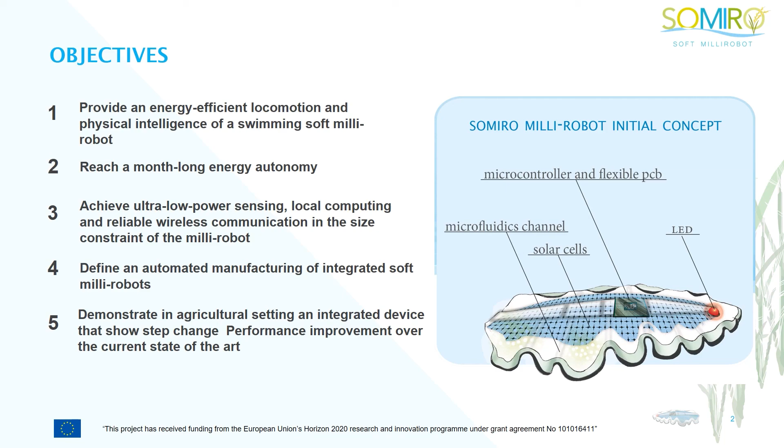SOMIRO's goal is to build a swimming soft milli-robot, biomimicking flatworms, and by its large surface and compliance, it will become the first milli-robot ever to have energy autonomy so it can locomote for longer times without a dedicated infrastructure. To go where no one has been with 30 years of trials, energy autonomous milli-robots are like a Formula One car, with its main reason to demonstrate what is possible and inspiring by going beyond state-of-the-art.

For that, we have identified 8 fundamental technologies we have to master. Traveling wave locomotion for swimming soft milli-robots, ultra-flexible high-efficiency solar cells that can withstand water, thin and flexible multi-layer capacitors, ultra-low power visible light backscattering communication technology, ultra-low power nano-MOS-based gas sensing, stretchable RF electronics and soft digital printed circuit board technology, high-efficiency power converters, and soft actuators and autonomous insect-sized soft robots.

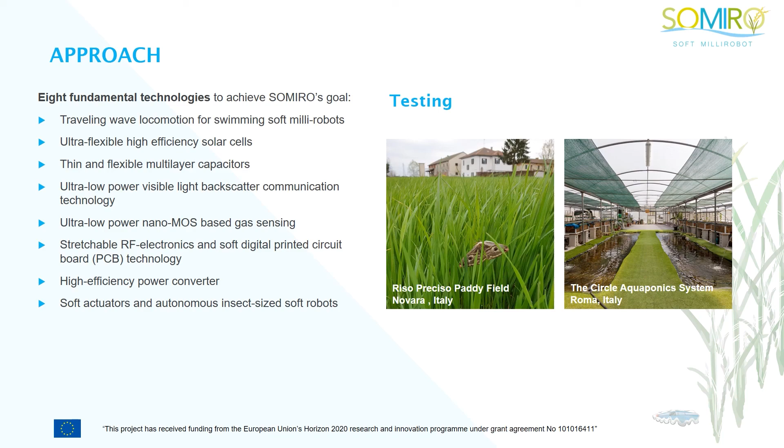This is a high-risk, high-gain project, but success in each technology will have impact. Of course, the largest impact will come by proving that milli-robots can be energy autonomous for longer times, opening up for robotic solutions that we have dreamt about for decades.